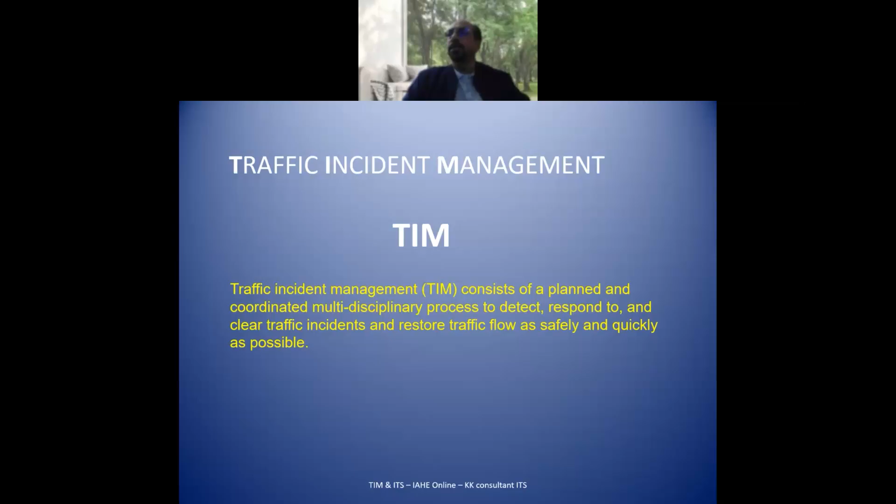Let us now look at what is a traffic incident. An incident is defined as any non-recurring random event that causes a reduction of roadway capacity or an abnormal increase in demand. When traffic is flowing smoothly, everything is all right, and your surveillance and cautionary systems are awake to make sure that if anything goes abnormal, they jump in immediately and start acting on that. Now, what are these incidents?

It can be a traffic crash, between vehicles coming and pushing at each other. A broken down vehicle, got broken down, tire punctured, or engine getting heated up, or whatever way. The third can be spilled cargo, and mind you, if the cargo is chemicals of different order, or petroleum, or any such things, the intensity of the incident grows. And then there can also be incidents during highway maintenance and reconstruction.

And the other type of events that could happen are non-emergency events. You have games scheduled near the traffic region, so you can expect a lot of vehicles coming at a time towards the game venue, and also the same way when it is actually over. True for concerts, or even public protests or meetings, and things like that. These kinds of events happen on a highway, and how effectively we are able to handle it is what traffic incident management is all about. The most important and difficult thing to handle is to avoid the secondary crashes.

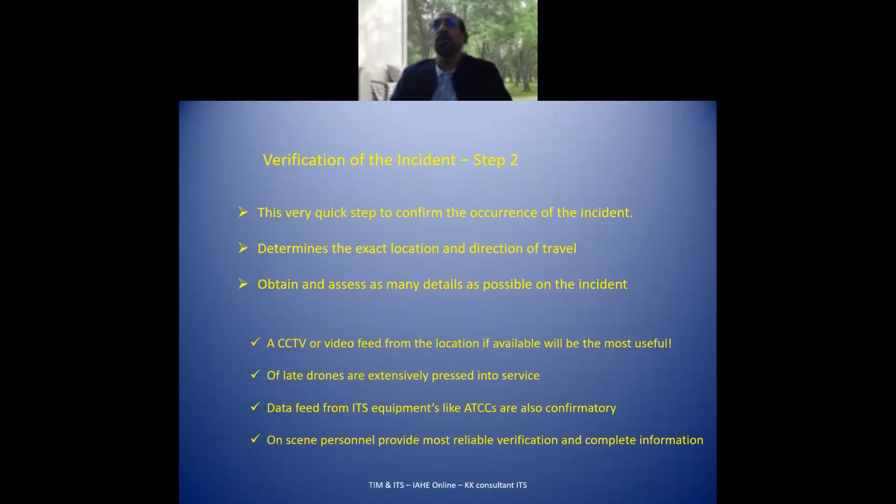And then the on-scene personnel - there will be good Samaritan drivers who stop by, stand at the incident center, and then immediately start giving information and details to the control room as to what is actually being witnessed by him.

The technologies used for detection and verification are inductive loop detectors. These inductive loop detectors are simple electric copper coils, 1 to 2 inches below the ground with some voltage passing on them, which creates an EMF. When vehicles, largely metallic vehicles, pass over them, they cut the flux and create an EMF based on which it can register a presence and even provide data as to the class of the vehicle and things like that.

Similarly, magnetometers are put in the locations. Microwave radars, I just mentioned to you, are used extensively in Europe and the Middle East. Infrared detectors are used where we have higher problems of snow and things like that. Ultrasonic detection is also used in many places. And video imaging - when the visibility is good, video imaging and image processing is the best process available.

Provided the environment is clean and you are able to see the thing. Closed circuit television camera, of course. Location systems, GPS things, can actually take input from different places and combine them so that you have a primary, secondary, and tertiary confirmation for the incident, and then go ahead with the next plan.

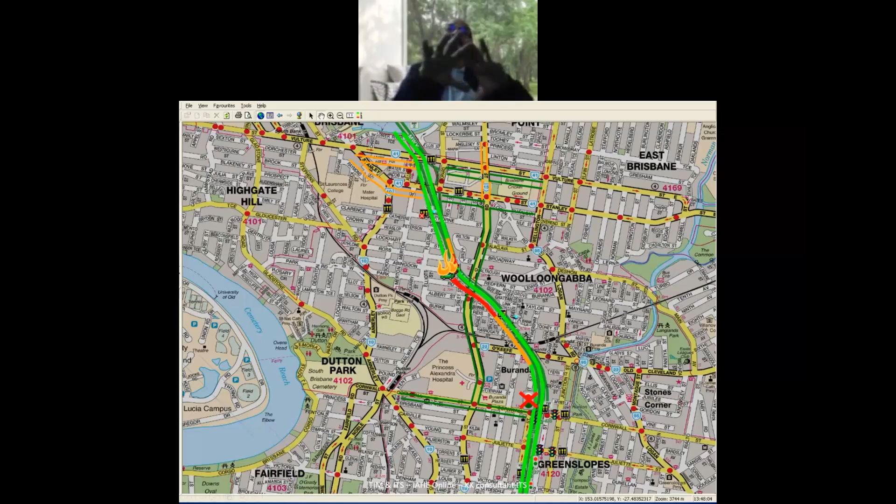But suppose now, what do you do next? The first thing you have to do is that traffic is already piling up here, so the entry to that location is locked and closed first. They close the junction, and the next thing is the variable message signs go out to all the people, informing them where this particular incident is happening.

All the traffic which will get affected by this particular incident is notified using VMS. Mind you, each VMS has the appropriate and right message for them so that they do not make any mistake. Here is the first example.

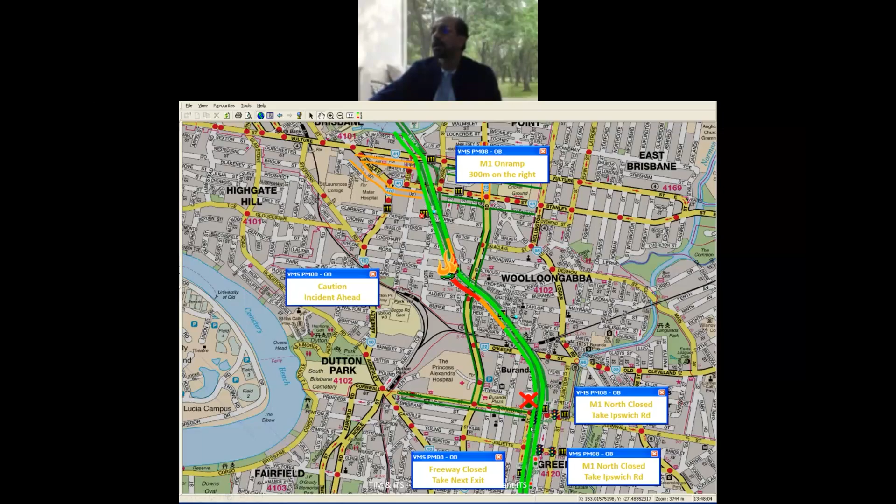It clearly says ahead, the freeway is closed, take the next exit. So people normally take the next exit, the junction, and then here is some trailing traffic.

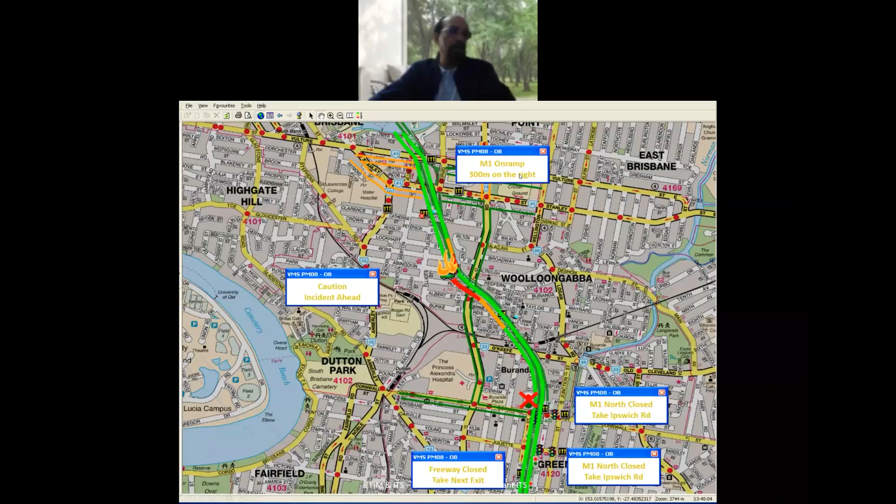Trailing movements into the highway are closed, so they are asked to take alternative routes. At the end of the road, ramp meters at those locations are also organized in such a way that they behave separately.

Once this is done, the traffic signal system actually reroutes the traffic. The traffic coming here is automatically asked to turn left. This left-hand traffic, though the road is not as good as the highway, is given a green signal corridor, cutting across the incident portion and joining the highway at a later end. In this way, the whole traffic is managed.

All this happened much before I finished the first sentence. So that way, ITS technologies are using incident management in a very, very effective way. But I have tried to get something similar to explain to you from the Indian environment, and I'm told I have to wait. So let us see that we don't have to wait much more for this.

Now let us look at what is happening in the Indian scenario. What we saw was an Australian incident, and now what will happen in India. This is an area which is yet to mature; there is no maturity at this level, though the right steps are being taken in that direction.

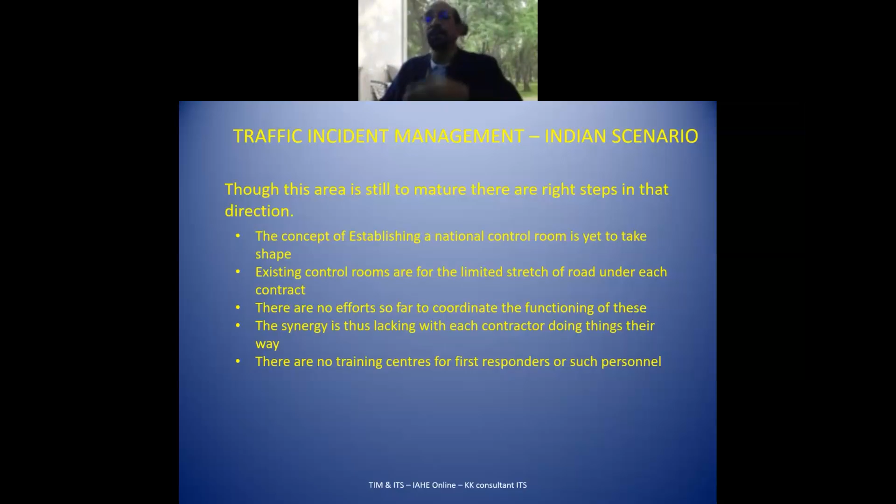And then, our respect for data. A few years back I asked the chief of road safety in NHAI how many people died on NHAI roads last year, and he didn't have a count. You ask NHAI brass what is your traffic at the moment on different roads, they have no clue. This is because the connectivity is not done.

NHAI as an organization has to think from a different point, not just looking at things in a limited way. At the moment, NHAI as an organization doesn't have a soul.

They have one or two, two or three service officers sitting at the helm who have limited exposure to technologies and things like that, and engineers and others coming on deputation from different PWDs and all that. All of them come with their own baggage of working systems. NHAI as an organization, I think even recently there used to be a GM, DGM level post in electronics and IT. I was checking recently who holds it, and I found those posts no longer exist.

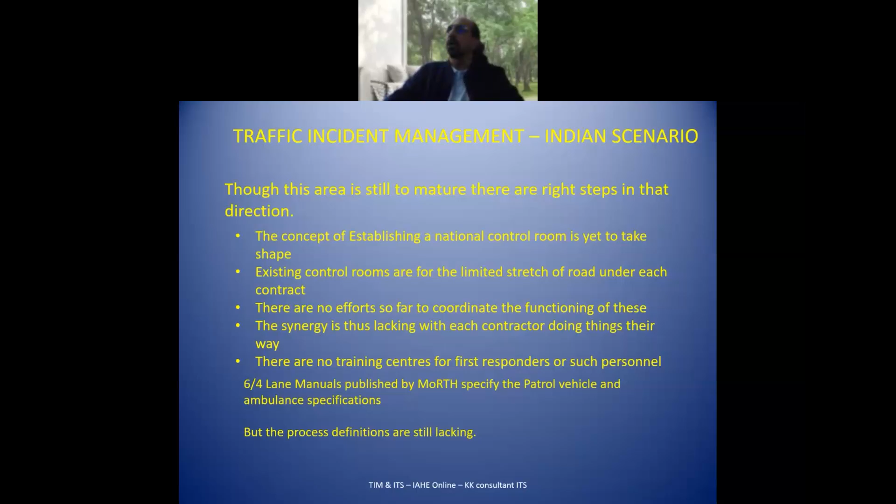It says there should be AVLS, there should be a two-way radio device so that even if the mobiles are not working, radios has to work. There should be a public address system to announce with an amplifier and loudspeakers at the accident scene if needed, and definitely one cellular phone.

And general surveillance equipment like digital camera, high torch lights, safety jackets, gumboots and helmets for every attendant. Rain suits, liquid containers of petrol, diesel, water, and rope, and minimum things like whistles and hand signals.

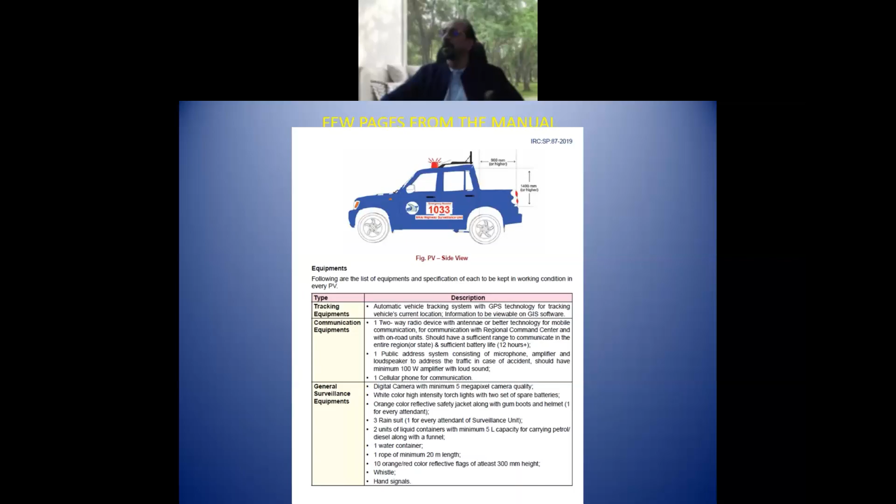It should also contain first level vehicle restriction and repairing equipment - hydraulic jacks, animal handling equipment if needed, tire inflator, starters, tow bars for towing lines, and a normal mechanical kit with hammer, pliers, cutters, wrench, and all that kind of stuff.

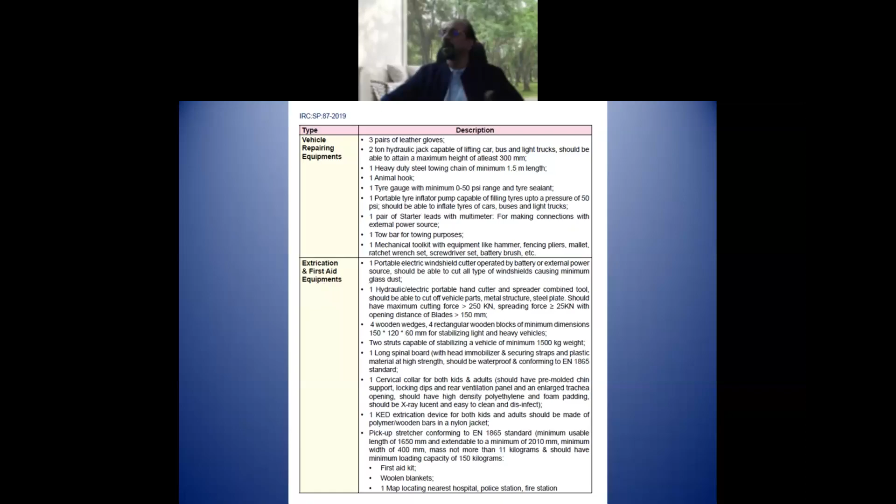This vehicle repairing equipment also contains extrication and first aid equipment - portable electric windshield cutter operated on battery, hydraulic electric tools, cervical equipment, and other things.

When you actually do traffic management, you should have fire extinguishers, dry powders, asbestos and rubber gloves or whatever. All the items that you should find in a standard patrol vehicle are listed very clearly as per Indian specifications.

Now it has retro reflective signages, but at least that is one thing I find - till recent years, nobody used to wear even the retroreflective signs on Indian highways. But now things have changed, people started wearing them, and that is a good omen.

And then you have surveillance in charge - one person is to be there as the main coordinator from the control room, similar to the 911 operator as I was mentioning earlier. The highway surveillance should be appointed per shift per vehicle, and they should have relevant experience and should create a logbook.

They should be trained on vehicles and maintenance policies, radio communication, public relations, defensive driving, customer service, maintenance of traffic - similarly, all rolled into one kind of training. They are not supposed to be experts, but they should not be making blunders because they don't know. That is the key for training.

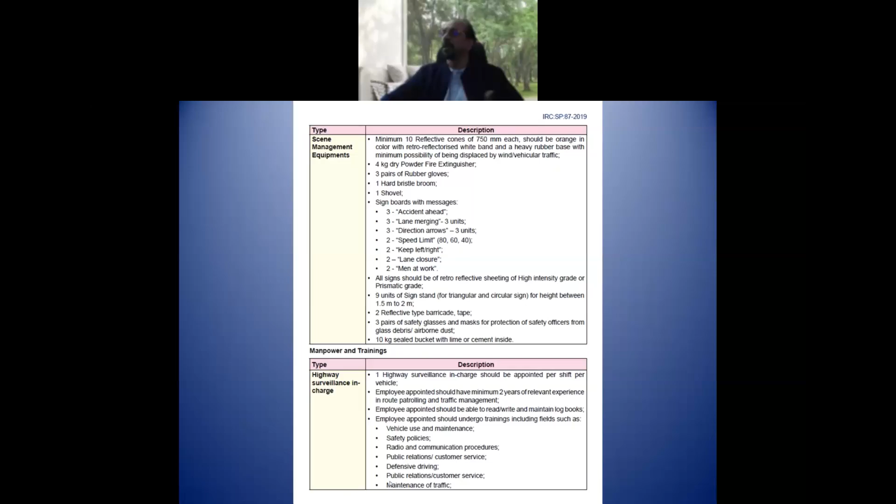And then they also should know the vehicle recovery procedures and all that. And then the EMTs, basic qualification of EMT, there should be a diploma in EMT. The qualifications of the people who are employed there are all very clearly stated.

Employee appointed should undergo at least one month training for this kind of things. I would actually want to bet, out of the thousands of vehicles flying on Indian roads, how many actually have this - not on day one, but 180 days or a year after putting into service. If any patrol vehicle in India can confirm that they actually do this, I would be pleased to award them with a cash award. And all the students, all the people here, are eligible for the recommendation.

This particular document also goes and talks in much detail about the emergency medical van. It specifies each van's equipment in exact detail, the capacities, the power management, and it should accommodate two serious patients at a time, with minimum required equipment. Some salient portions I felt are worth highlighting here.

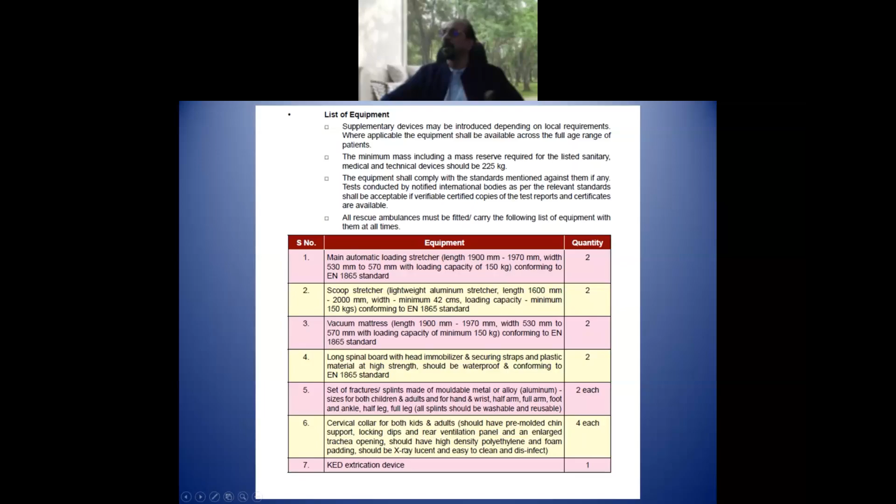You see, even for children, they wanted a separate shape of collar, and even trachea opening ventilation panels made of high density polyethylene and foam padding, and it should be X-ray lucent. And you see the list of equipment - oxygen cylinders, portable oxygen cylinders - all fine, even pulse oximeters, stethoscopes, and blood sugar detection, all these things are provided for.

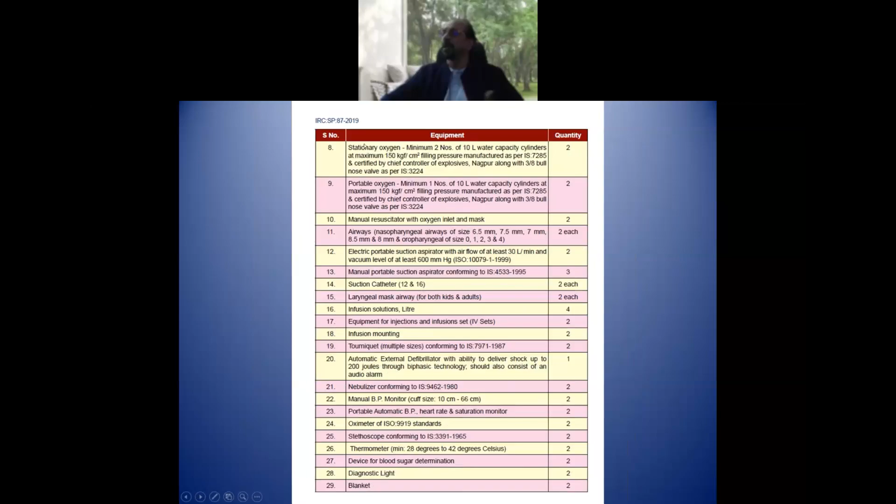But you go and look at any of the emergency medical service vans posted on our highways, and again my offer stands - I'll be willing to provide a cash award to any vehicle these members are noticing which can be recommended. And then there's the manpower of the ambulance.

You should have proper ambulance personnel. First aid becomes the most important thing in actually securing the person from getting into more trouble. They need at least 2 years experience in first aid and life saving, emergency operation, bleeding control, spinal immobilization, oxygen therapy, defibrillation, medicine.

Not to talk about fundamental things like post procedures and things like that, and training on handling life-saving equipment and basic training in extraction, and also there has to be paramedics on board.

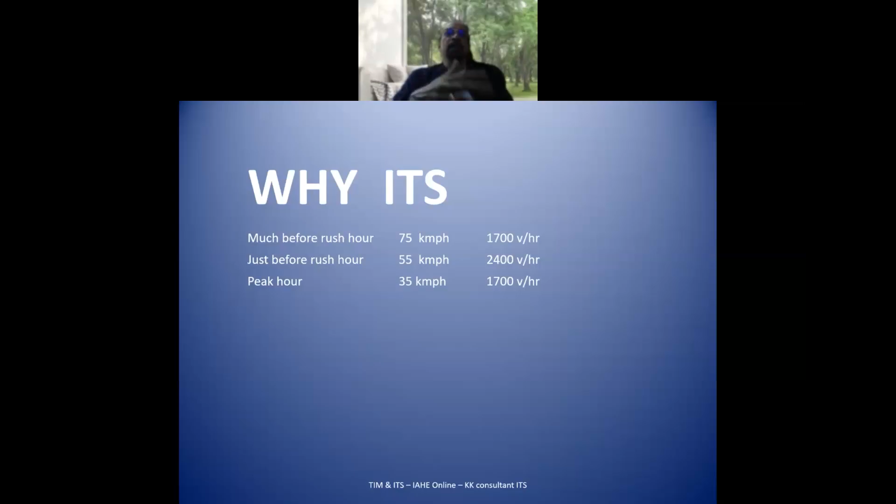Now we will talk about ITS. Everybody knows what is ITS, Intelligent Transport Systems. There are many kinds of definitions. The ITS handbook I saw some time back described some 30, 36 types of definitions, but I would like to consider it as IT in transportation. It is about providing information to motorists and aiding traffic management, resulting in smarter use of road networks, and it has to do with knowledge management. This is the most cost-effective tool available to traffic managers as of now.

Now, why intelligent transport systems? Consider a road near a city or a highway feeding some urban center. Much before the rush hour, say morning 7 o'clock, if you look at the traffic, you will find vehicles going at say 75 kilometers per hour, and we have a clearance of 1700 vehicles going per hour. As the traffic builds up, just before the rush hours, the speed comes down to 55 kilometers per hour, and the vehicle flow becomes 2400 vehicles per hour.

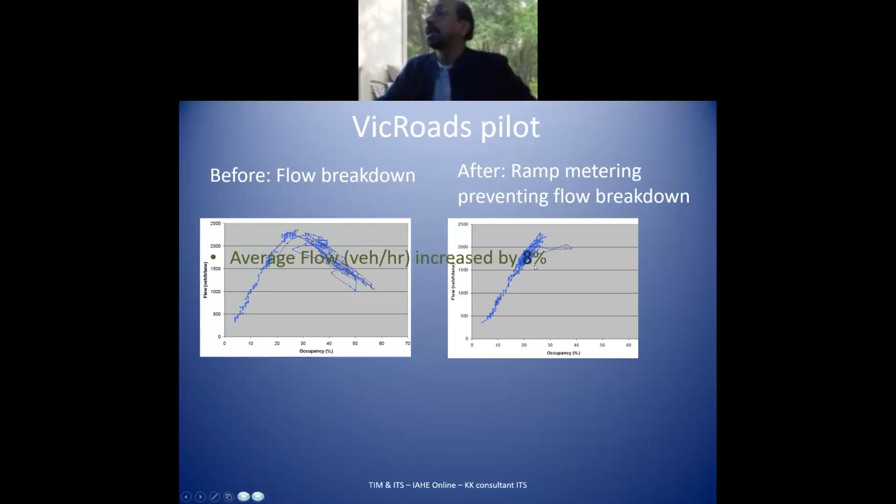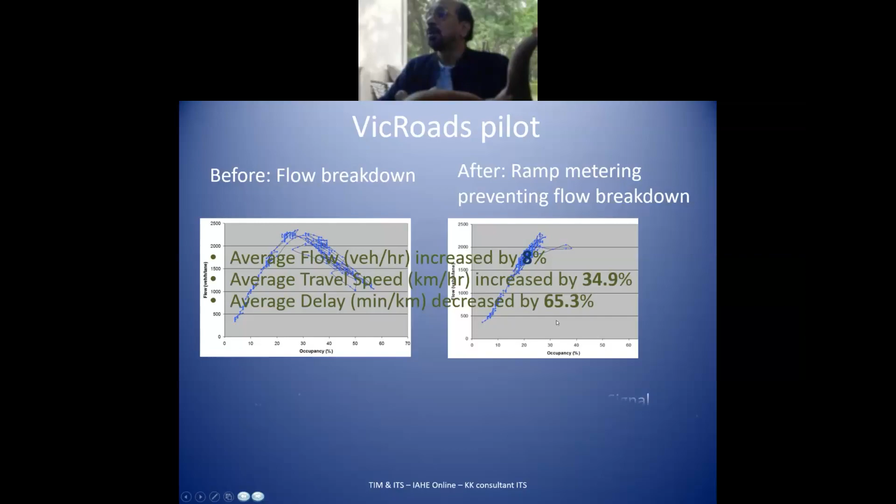When there is a breakdown, when there is a congestion - this is actually a VicRoads pilot. VicRoads is a state government road organization of the state of Victoria in Australia. This was an award-winning ramp metering algorithm which they developed and is being used by many people. It is available in the public. But when the breakdown happened, this is how the traffic came to see - the occupancy has gone up to 60%, and the flow of vehicles, which kept on growing, at 2,500 it stopped there and didn't go further. And instead of the level of service, the speed started coming down.

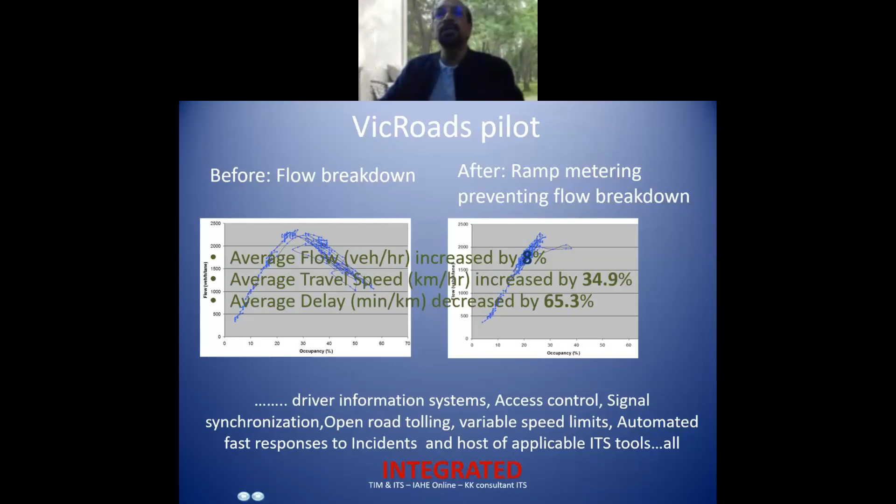When we introduced ramp metering, this is similar to that lady operator pouring the rice directly into the funnel. The ramp meter is able to provide traffic flow unhindered by controlling them upstream, and the breakdown didn't happen - the vehicles kept on going the same way. Here, what you see is the average flow increased by 8%. These are documented, and average travel speed increased by 34.9%. More importantly, the delay decreased by 65.3%. This is what ITS did in an environment which was otherwise unhelpful.

So what you are doing here is ITS - when you talk about driver information systems, access control, signal coordination and synchronization, open road tolling, variable speed limits from the control room, automated fast responses to incidents - the subject we just covered in detail - and a host of other applicable ITS tools. All of them in an integrated manner make it a proper ITS system.

Now we will go into the applications. What are the ITS applications?

ITS applications, first and foremost, aim to improve traffic flow and reduce congestion. If road capacities or intersection capacities reach a breaking point, an ITS system can increase the capacity of the network by a minimum of 10%, meaning 10% more vehicles can use the same road while enjoying the same level of service.

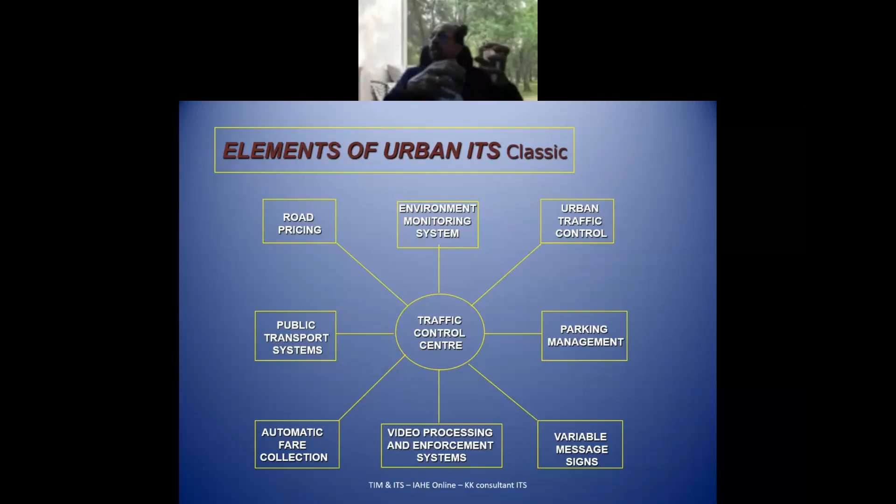What the system does, if possible, is extend the green time available. If the green is already running on that particular link, the public transport system will increase it for a few seconds so that the public transport can go through. Similarly, it can open a red to a green when the public transport arrives, depending on the priority fixed for them. And of course, there's road pricing - we'll talk about that also.

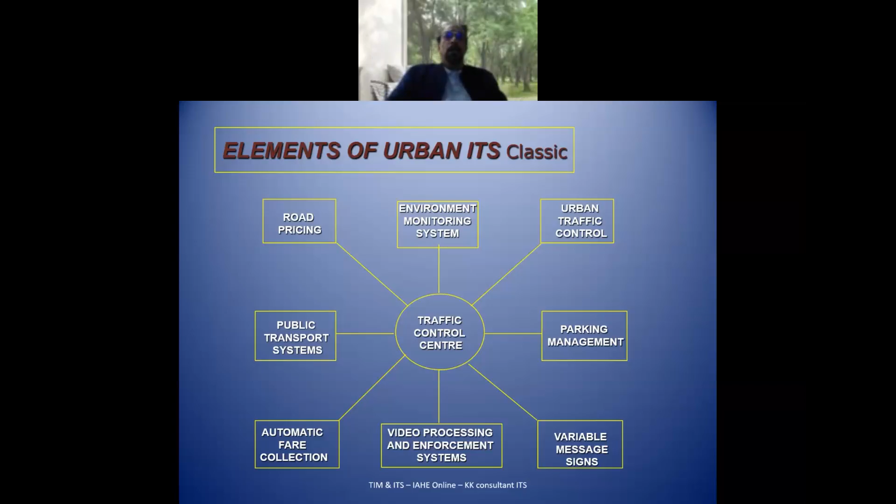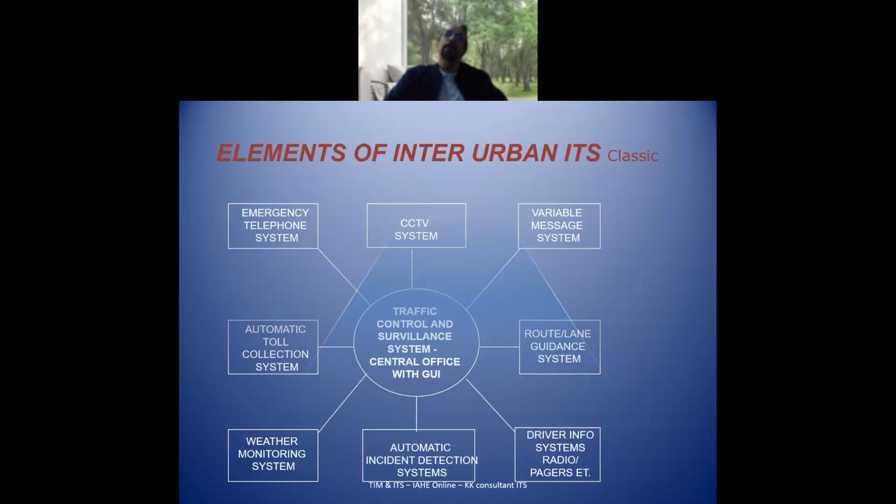These are a separate set of subsystems that form an interurban or highway traffic control system, distinct from an urban traffic control system. In the urban traffic control system, all this equipment works 100% of the time.

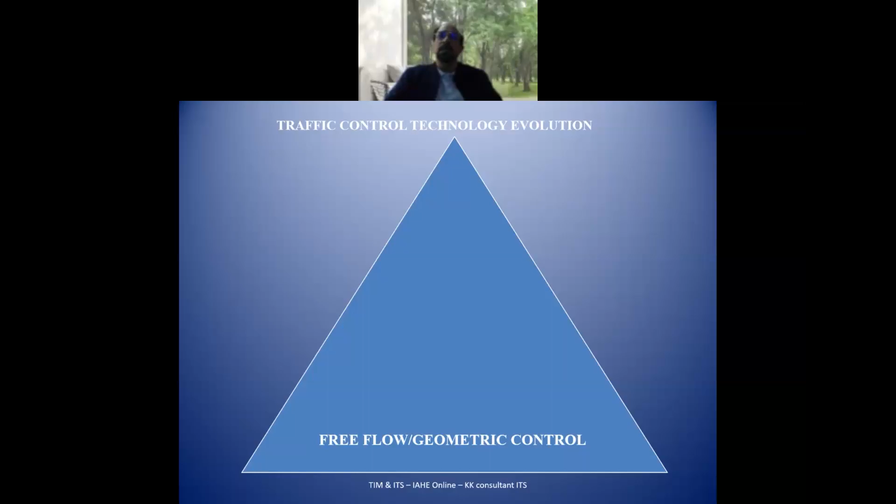The urban system keeps collecting data, making arrangements, changes in traffic flow, and adjusting traffic signal timings, parking measurements, video processing - all these go in as standard. Whereas in this system, except for toll collection, everything else is a standby system.

It comes into action only if something unnatural or unexpected happens, like an emergency telephone system lying in wait for an emergency and somebody to push the button. So the level of readiness and checking of the system has to be much more, because you should not let any of the system fail at the time of requirement.

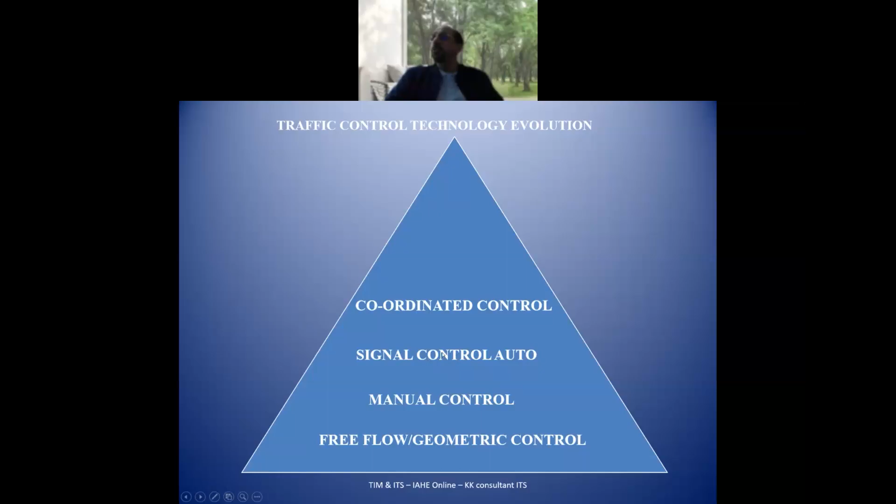The CCTV system also keeps doing all these things - they are actually sleeping, but in the right stage of awakeness. Anytime they can be put into action, except the toll system, which keeps working.

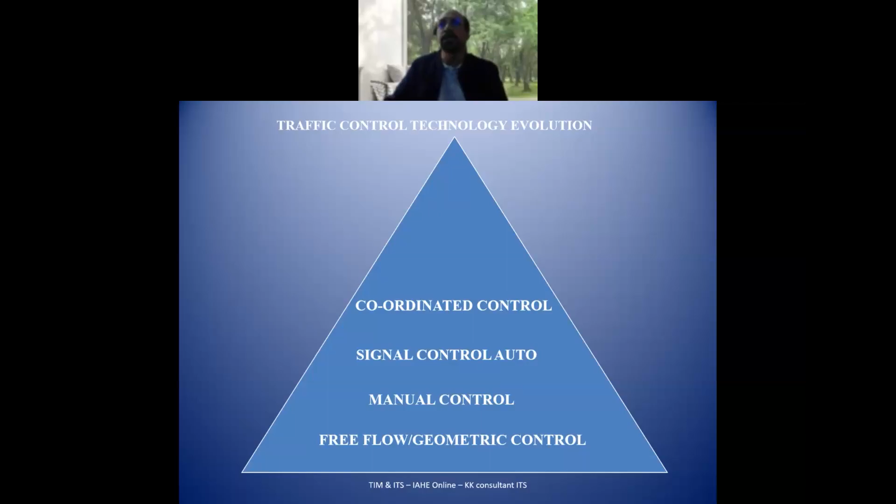Now let us look at the technology of traffic control and how it has evolved. Imagine a small junction that has come up near your neighborhood. Initially the 4 roads are there, and traffic just goes because there is no control - they manage themselves. Then sometime in the evening and morning, it gets a bit crowded.

Then a policeman or a traffic warden will come into the middle of the road and start manually stopping the traffic from going in one direction to the other. Then you have the next step, signal control.

You put an automatic signal in place. This automatic signal will have more timings during peak hours for the peak traffic, and during off-peak hours, it will get into a low cycle time and start clearing vehicles from each direction quickly. And at night, maybe they will just go to flash.

The next one is coordinated control. If you have 2 signals at 2 nearby intersections, the output of one junction becomes the input of the other. If you are able to manage that, that is called coordination. So this is the next step of technology.

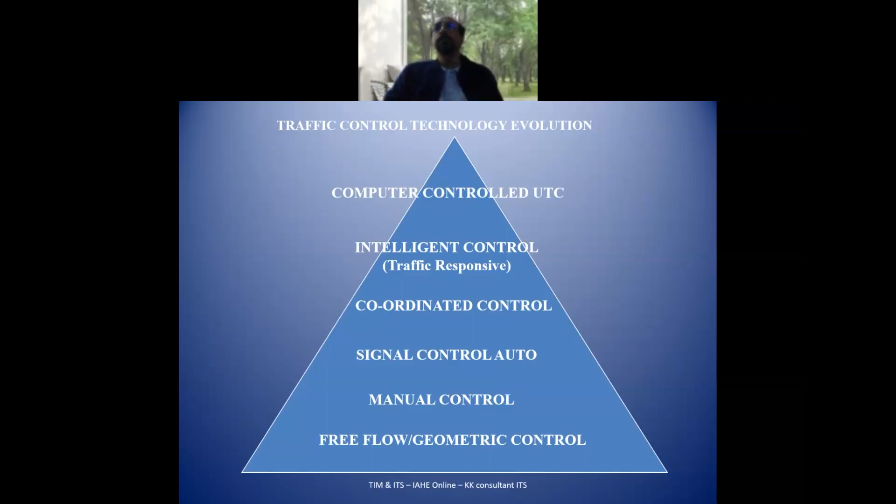And then we got the intelligent response. In the intelligent response, what happens is there are loops or detectors in the system which are collecting data on traffic flows in a continuous online manner, and feed that data into the information system.

And at the intersection, there are supposed to be 2 levels of control: one is called tactical control, the other is called strategic control. In tactical control, the intersection controller takes a decision to extend the green or open one particular direction earlier, because the other traffic has lessened, or even give priority to somebody. That is a tactical decision.

Then there is another decision taken by the central control room - say, I want the nearby controller changed because of high traffic flow in some direction. It has changed the cycle length from 90 seconds to 100 seconds. So all the signals which are coordinating with that particular controller - they're called married systems - I'll come to that - all change strategy from the central point.

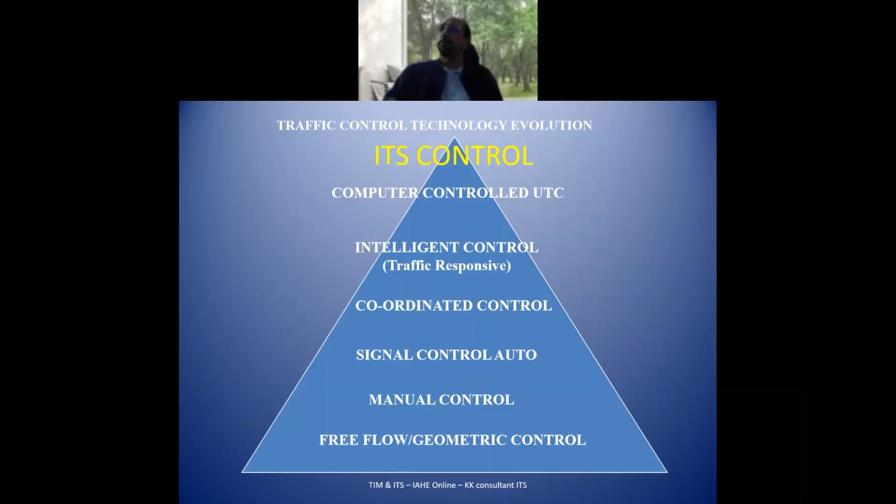The next level is called area traffic control, computer controlled UTC. In other words, in this, the controllers are all connected to a central control room, and all the data comes into the central control point. From there, each signal is advised every second whether to continue the current state or go to the next stage.

And in this level, you don't find anything other than traffic signals and traffic detection at signals and traffic lights. The next level is ITS control, where we bring in a host of other subsystems like variable message signs, public transport priorities, and communication control systems which are used by transport agencies to have control.

If all the systems that come up with information, even the taxi aggregators, share the information with the traffic control room, it can provide a good travel time survey, travel time data, so that people are aware of things. Now ATC stands for area traffic control. This is also called UTC because they start mixing up with air traffic control.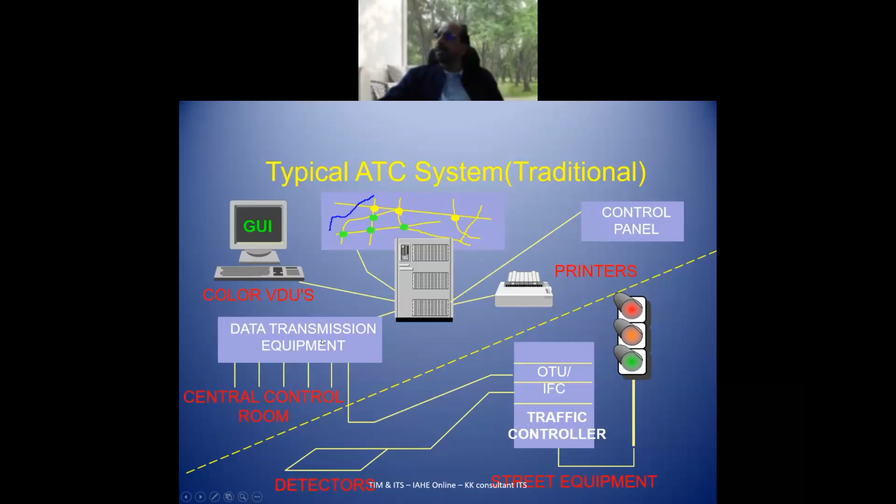Whereas other cities have changed into smart cities and have some rudimentary type of traffic control systems, not really smart ones. So except this ATC in Bombay, I don't think there is any other real internationally valid system working in India at the moment. In Bombay, my team only installed that in 2009-10. It is 13 years old and now it is in the process of being replaced. But it's still working - I think they are covering some 256 junctions, and they have contributed to road safety in a substantial way.

I wanted to give you a small idea of a traditional system. In that you have a traffic controller. This traffic controller has street equipment, signals, and an outstation transmission unit and integrated front-end processor, and it has the outstation transmission communication, and detectors based on that. The detector data goes through the transmission system, which used to be a very cumbersome process those days, to the central server, and the central server will have video, display, printers, and the control panel. That will give information back to the signals - data is collected from here, goes here, and again the instruction will come from here and go to the signal line.

I will just cover quickly the algorithm behind SCOOT, one of the most successful traffic optimization online systems. I want you to concentrate and understand this - it is a very small thing. Take one cycle of traffic. One cycle of traffic is the traffic from one point to the next point where the same point is reached.

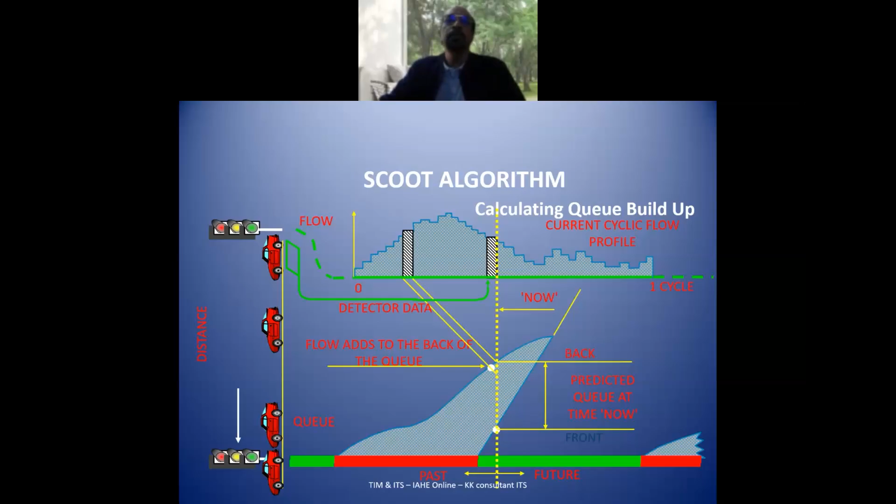In the next few seconds, the queue starts melting away. These vehicles which are there from the previous cycle keep going, and the major traffic which is coming here, without making this queue huge, it dissipates, with some small change in the traffic flow. But then the majority of the vehicles from the 30th percentile onwards are able to go through the intersection without changing their gear. I hope everybody followed this.

This is a very simple explanation. Now imagine this intersection has one link we talked about. Similarly, this particular intersection has another 8 links coming from every intersection on the 4 sides. So you have to have all these links do the same kind of thing, building up the flow at each link.

After some iterations of working, the computer system is able to get into a rhythm in which the traffic is moving quite well in the area. There are no queues formed abnormally at every intersection. Before the queues are formed at every link, it is opening and going. You can actually view this in the intersections where they work. We have done it in Delhi, in Bombay, in many places. It is a perfectly feasible system.

I'm not spending much time on this. What I want to talk about now is optimization - the objective functions, the priorities on which your computer system will start working to get the system into an area where it is able to provide the best services. Increasingly, additional objectives achieve more inclusive overall optimization. Developments in ICT, information and communication technologies, enable us to break free from traditional limitations and provide more action.

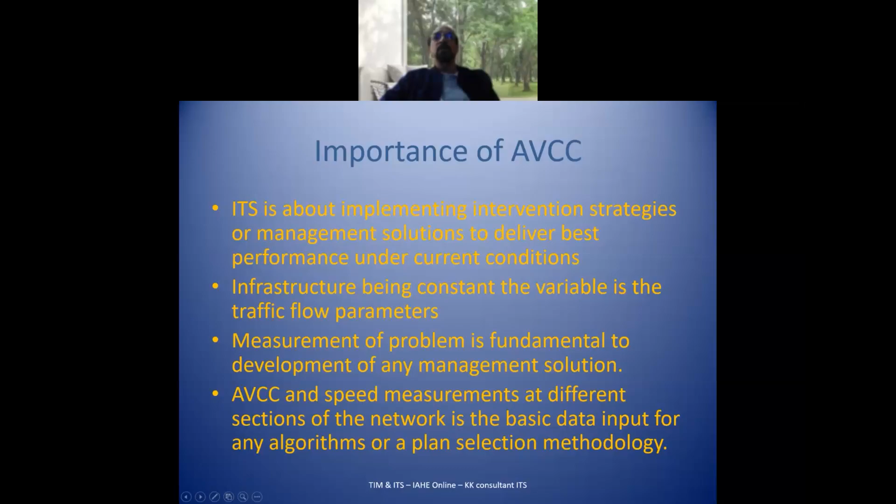Now, what ITS is about is the data - data about vehicles. This is one key point I wanted to emphasize. I want practicing traffic engineers to be better informed on these technologies so they can actually act. Everybody knows the importance of data - the importance of AVCC is just that. An ITS system is useless without proper data.

This is about collecting different types of data. AVCC can measure with infrastructure being constant - the only variable is the traffic flow parameter. So unless you catch that, measurement of a problem is fundamental to developing any management solution, otherwise you will never know what happened. AVCC and speed measurement in different sections of the road is the basic data input.

So I will go through these things a bit quickly now. There are different types - infrared detection systems here.

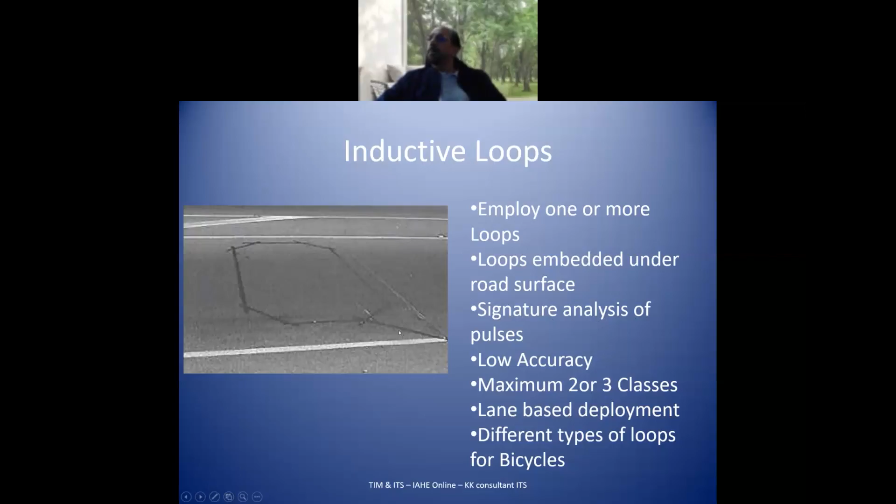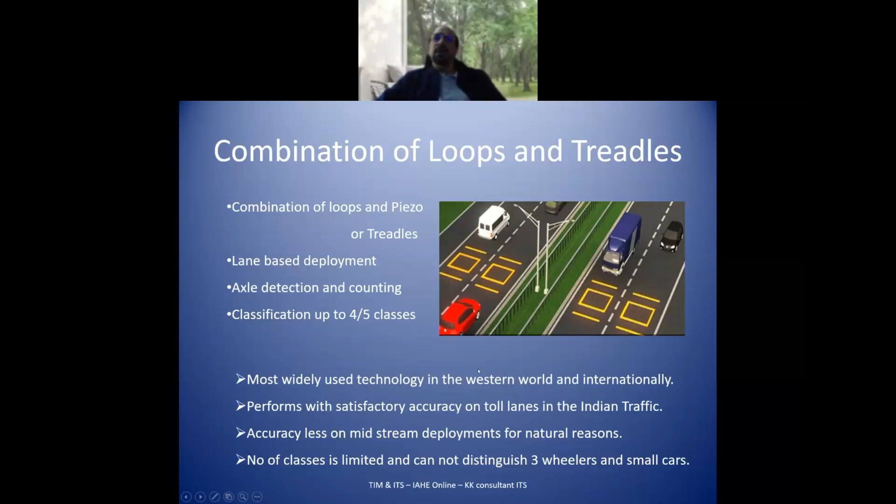These are one of the most conventional ones - again loop-based, for lane-wise detection. You put a loop, an electronic simple copper cable, one or two inches below the ground, connect them into a roadside unit, and pass a little voltage between them. So they form a kind of electromagnetic field around them, and when a metallic body goes above this, it cuts the flux and creates an EMF at the end. That is taken as a signature of that vehicle, and then it is analyzed. Then you have a combination of this.

This is one of the longest used, very heavily in tolling and things like that. You have a loop, and then you also have some kind of piezoelectric or load sensors. Here they allow you to measure the speed, taking the time as axles pass one load sensor to the other, and also take the measurement of size using this. It is very good, but still cannot distinguish a few things in our location, like types of cars and things like that.

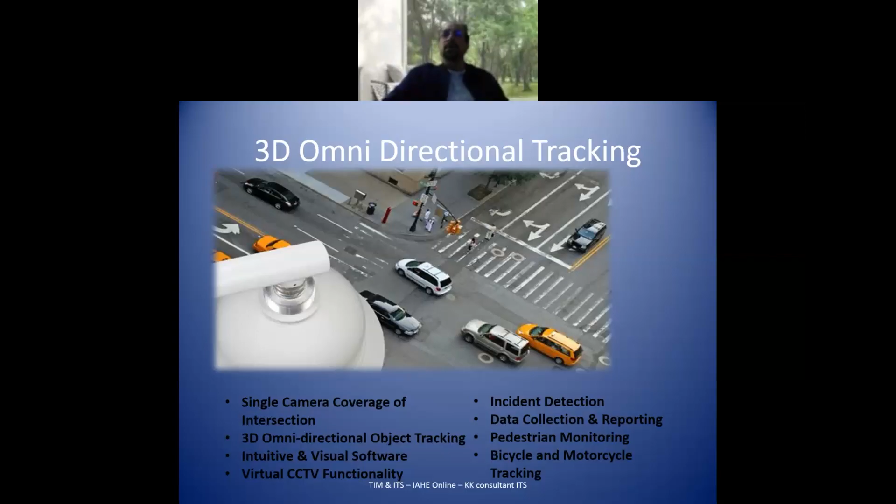The AI processors are not cheap, and they can't be portable. So what best AI can do today - unless it is simple iterations and hill climbing techniques and that kind of thing - no real AI is available on a portable device other than learning curves.

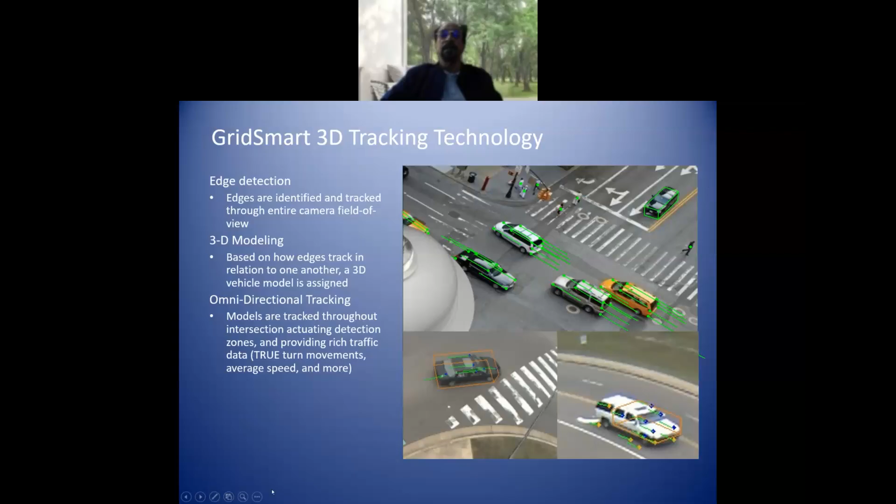This is another interesting thing, a similar concept. This is single camera coverage - right in the middle of the junction, imagine, you put a camera. And it's a 360-degree camera, 180 and 180, so it is able to see vehicles coming from 300-400 meters away, from either direction.

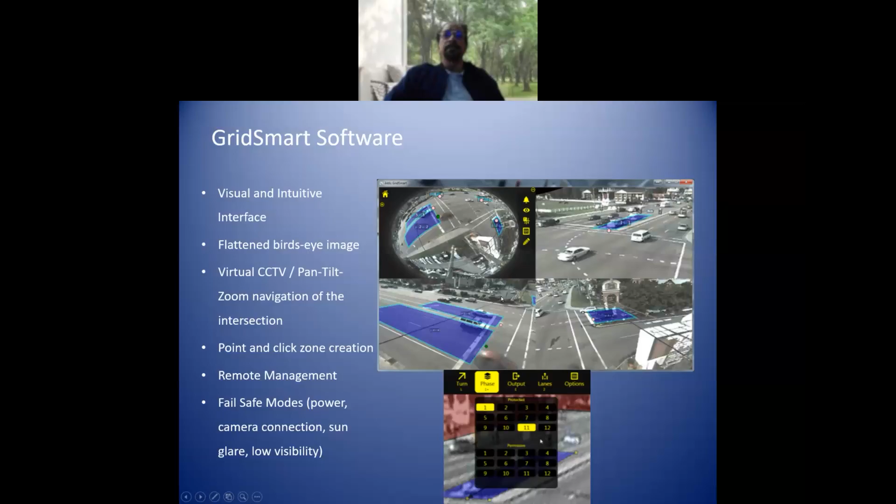So when this vehicle is right in the middle of the junction, it is able to detect the edges. Using the edges, it is able to provide 3D modeling, and using omnidirectional tracking, it is able to provide you the class of the vehicle - whether it's a small car, a big car, a pickup van, or a truck, like that.

This is a software which I am working on. It is from a company called GridSmart in the US. This is actually the first view, a bird's-eye view of the camera output. But using video editing facilities, you can make it look like each direction separately and look at it.

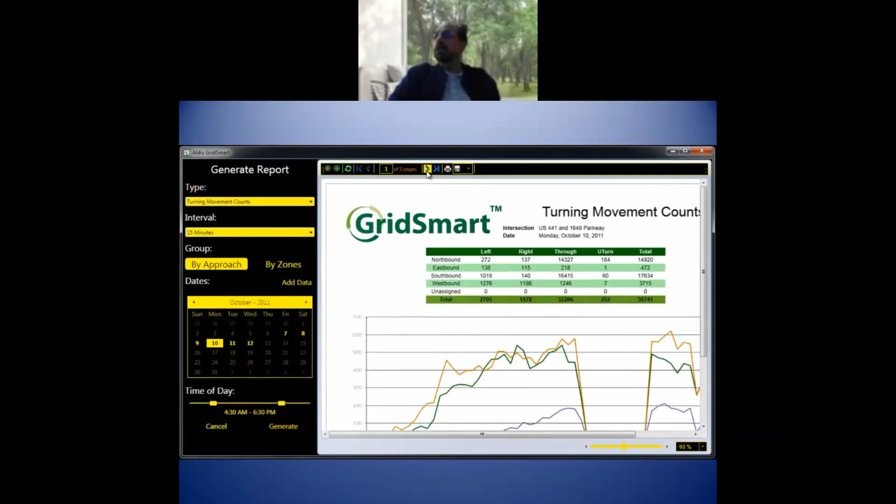It is very easy to create zones like this. There's a virtual pan and tilt available because it's a camera like this, and it can pan, tilt, and zoom to a certain extent, but very limited - zoom navigation of the intersection is only electronic. Point and click, you can just click here and create a zone like this, for example. It's remote, it's an IoT-ready project.

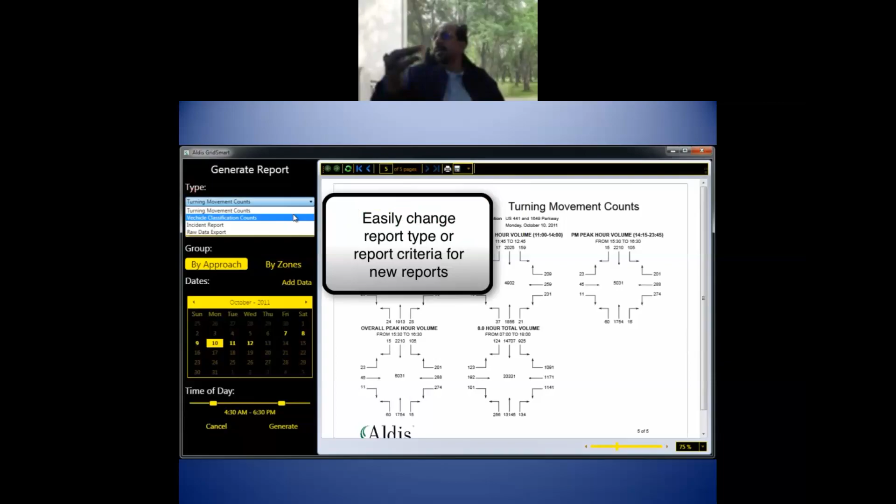There are fail-safe modes and things like that. This enables data collection from different sources, and it can generate data immediately the way you want it.

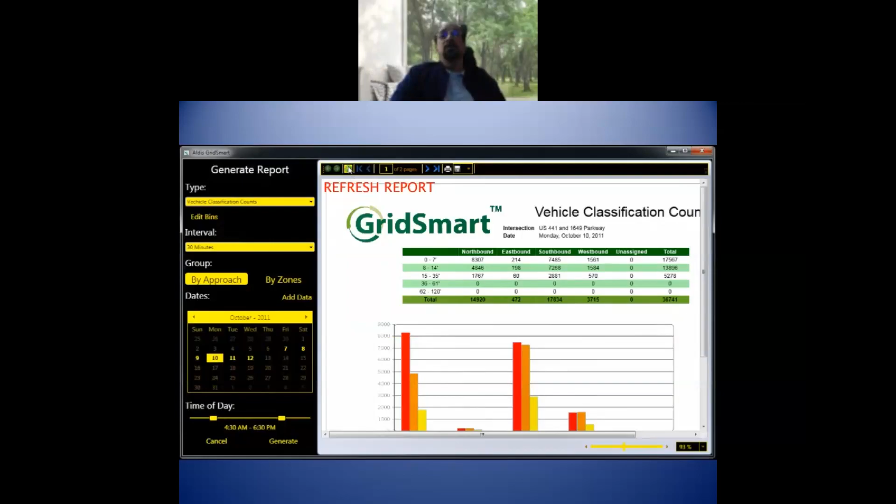On a highway, you can put a portable pole, and on top of the pole, at 12 to 14 meters above the ground, it can provide you data - it takes just 30 minutes. But in India, this is too costly a solution. So we tried this in Bangalore, in Mumbai. This is a very important thing.

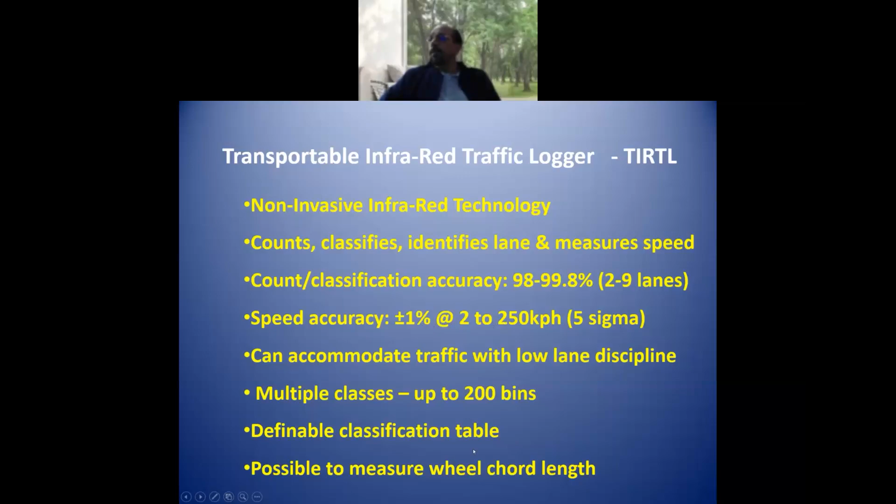Using GridSmart, traffic analysis. You can make this. You just select the system that you need, and then you want to build a report. So just select how many minutes, by 15 minutes, yes, by approach. What is the date you want? Pick up the date. What is the time of the day you want? Pick up the time of day that you need the report, and then say generate.

So here you have your report at a remote point. You have the northbound, eastbound, southbound traffic of any intersection. You can have the daily peak hour, peak moments, and you can get it in Acrobat or many kinds of formats. You can create bar charts.

This classification is based on the length of the vehicle. You can change the length bins. 0 to 7 feet is motorcycles, 7 to 14 feet is small cars, and then you can change that. So it is that simple to create data from this modern equipment.

The next one I want to talk about is the TIRTL. This is a non-invasive infrared technology. It counts, classifies, identifies lane, and measures speed up to 99.8%, minimum guaranteed is 98%. It has up to 200 bins. Unlike any of the other systems, it can accommodate traffic with low lane discipline. It has speed accuracy of plus or minus 1% up to 250 kilometers at 5 sigma.

It can define a classification table. I found this system when I noticed it in 2004, 5, 6, and realized it could be used for India. I happened to work with this and develop special software for India. In the next few slides, I will show you how it is done.

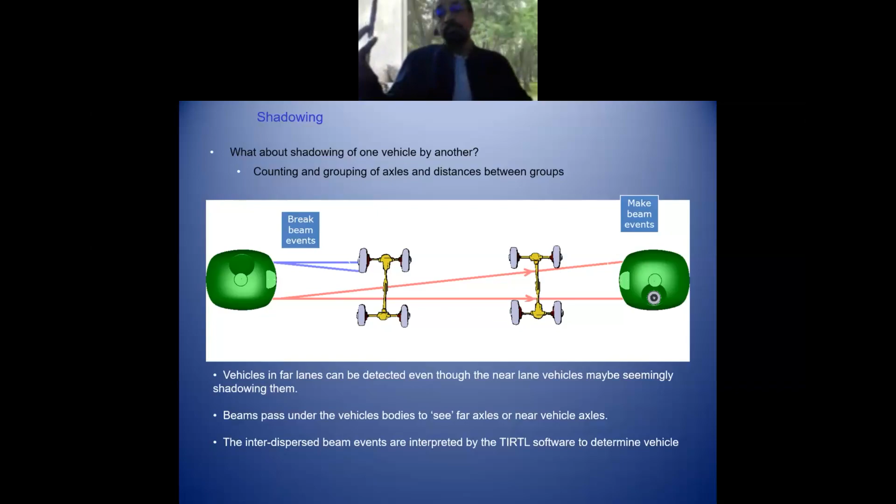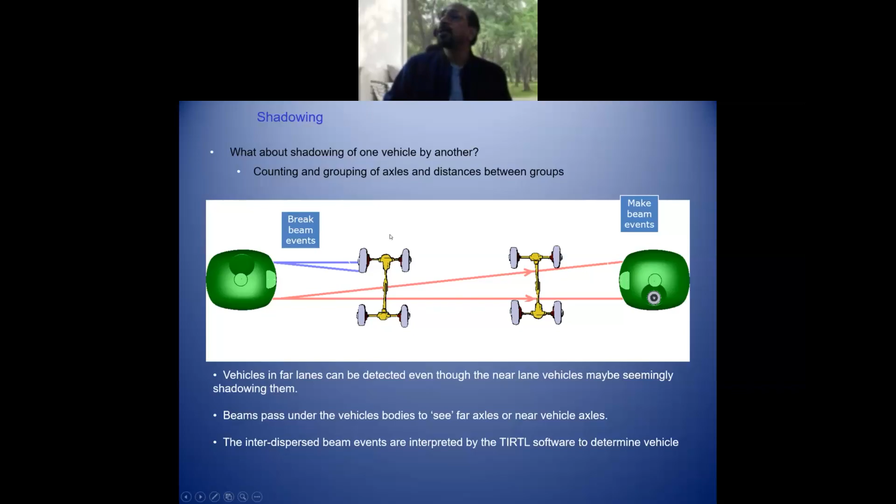Mind you, this is using an infrared ray, which has a wavelength of nanometers, and the controller, the computer used in the receiver, works at nanosecond accuracy. So we are able to make these measurements accurate to micrometers and microseconds. As vehicles keep going in this direction and keep breaking the beams, the algorithm behind the system starts producing the classes.

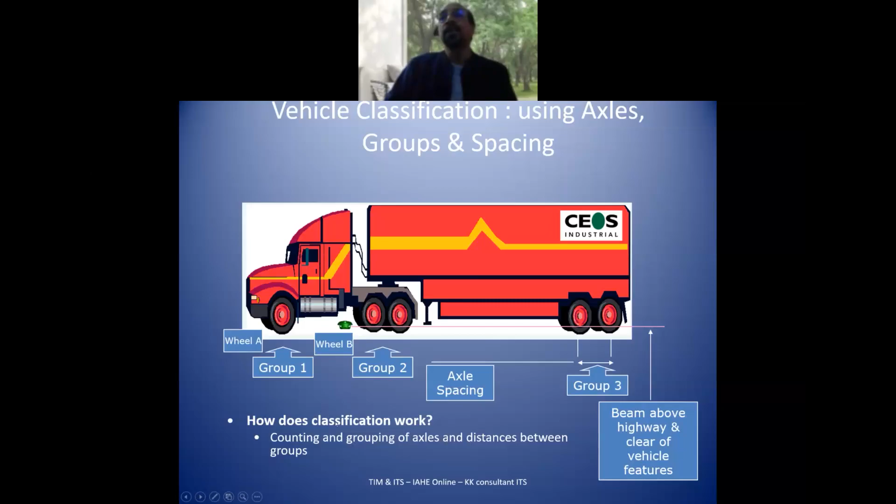Now, a question will be asked: if there are two vehicles going simultaneously, won't they obstruct each other, causing one to get missed? The far lane vehicles may shadow the near lane ones. But this patented technology, using a parallel beam and a cross beam, helps you see a vehicle even if it is exactly the same vehicle going at exactly the same speed, which is improbable. Even in that event, it gets detected.

With this system, instead of by lane, it detects the vehicle anywhere on the road. When a vehicle is going, suppose you define groups, such as a 5-axle vehicle using an articulated design, not a fixed one. You will find three groups of wheels, A, B, and C. The axle space between each of them is specified between these groups.

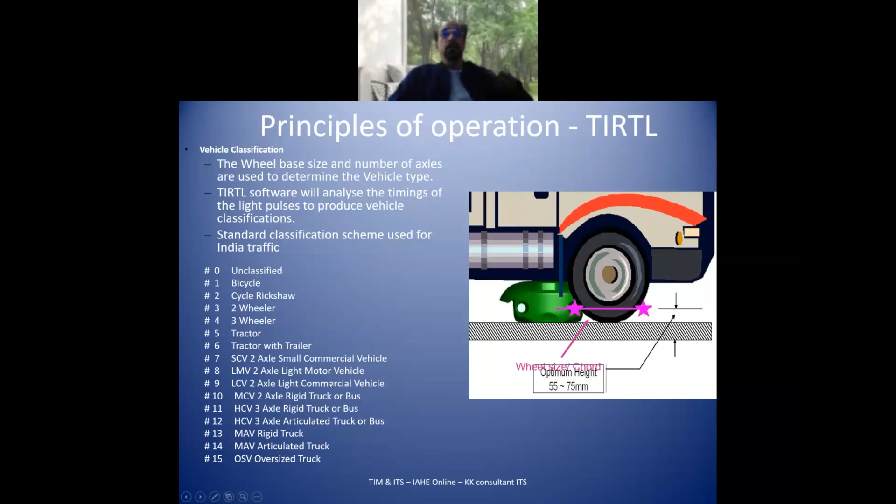So once this vehicle goes through the area where the TIRTL is located, the TIRTL knows how it has gone. By counting and grouping of axles and the distances between the groups, it is able to accurately classify this. Using this, when we first developed and put it in India, we designed 15 classes and got good accuracy.

The wheel-based axis, unlike other systems, can do a lot of other things. For example, classifying an LCV versus an Ambassador or a C-Class Benz is impossible for traditional systems because they have exactly the same axle length. But the tires used by them are different, the wheels used are different. The TIRTL is able to measure the type of tire used by each vehicle.

So when a vehicle is reported to the system with an axle length belonging to the LCV category, it will check what type of tire it is. If it is a car tire, it is classified as a car; otherwise, it is classified as an LCV.

Using this, we could have a classification scheme including all these things, and this was later modified to include the tolling pattern of NHAI, including 5-6 axles and 4-5. So you will start with bicycles, cycle rickshaws, two-wheelers, three-wheelers, tractor with one trailer, and very often you find it with two trailers. This is LMV, a motor car, light motor vehicle.

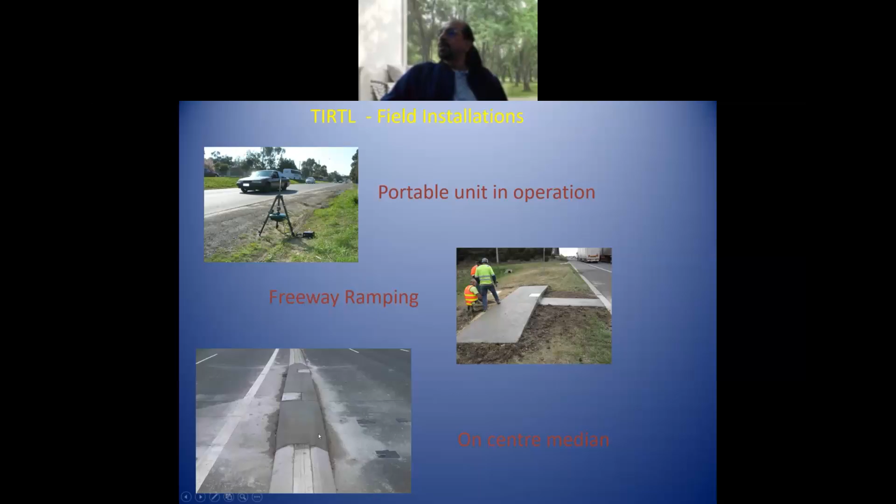So you find the number of classes from 2, 3, 4, 5, 6, 7, 8, 9, 10, and 11 do not exist for international products.

So this particular product was able to distinguish these vehicles accurately because we could look at their axles more importantly. And we have developed, together developed, a particular classification table and detection methodology for this, published it in India, and this gives you better than 99%.

And these systems are available, some 500 units already in India. This is the small unit which comes, which can be put on the ground at ground level, as you see. You can even put a solar panel and walk away, put a SIM. This is an IoT ready product. Even if a flood comes, nothing happens to it because this is IP67 range.

On the highway side, you can just put it like this and ramp on this. You can put a portable unit on one side and take data counts if you like, or you can even do it on the junction, on the road dividers. You can put two on either side. We have something like 400 units working here.

Now I have to show you a small demonstration of this.

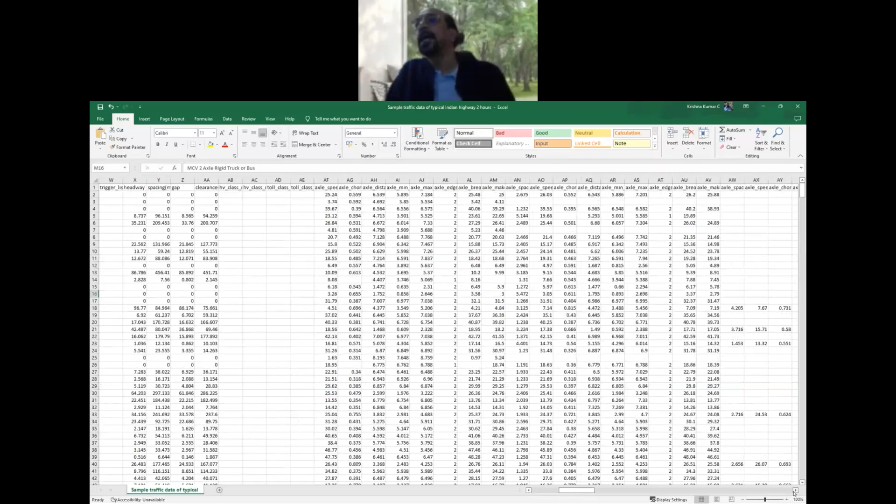This is the average speed. This is average axle speed. This is the direction in which traffic is going. This is the class number - what is the class of the vehicle which is going? What is the class name? It is what kind of vehicle it is.

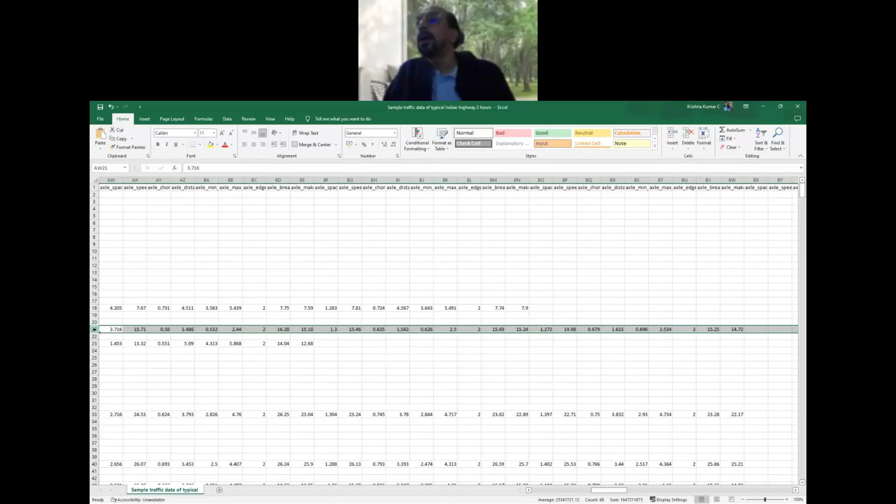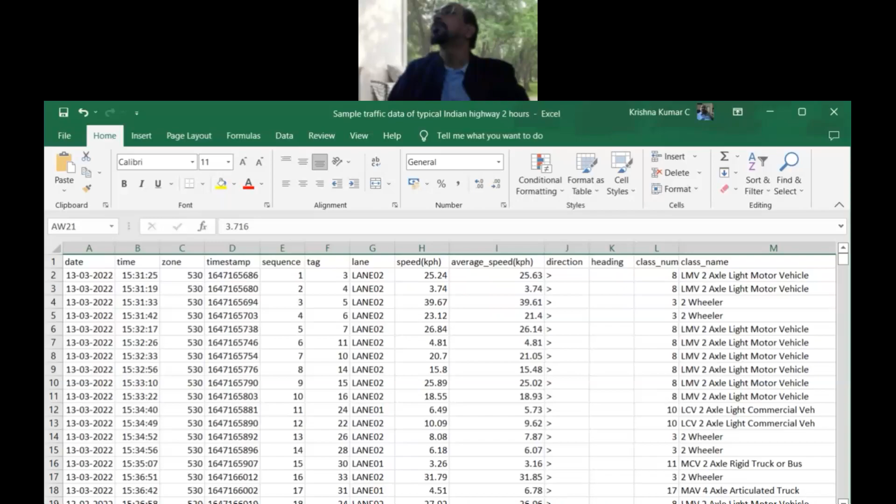You can see that 2-axle light motor vehicle, 2-wheeler, 3-wheeler. And then each of the axle data is given, how many axles it has. You have a 5-axle truck here, a 2-axle truck here, that kind of thing. And for each axle, it is giving you a wheelbase. It gives you the length, the presence, width, and distance, and minimum and max.

This is the data which traffic engineers need for making the models using occupancy, length, gap, etc.

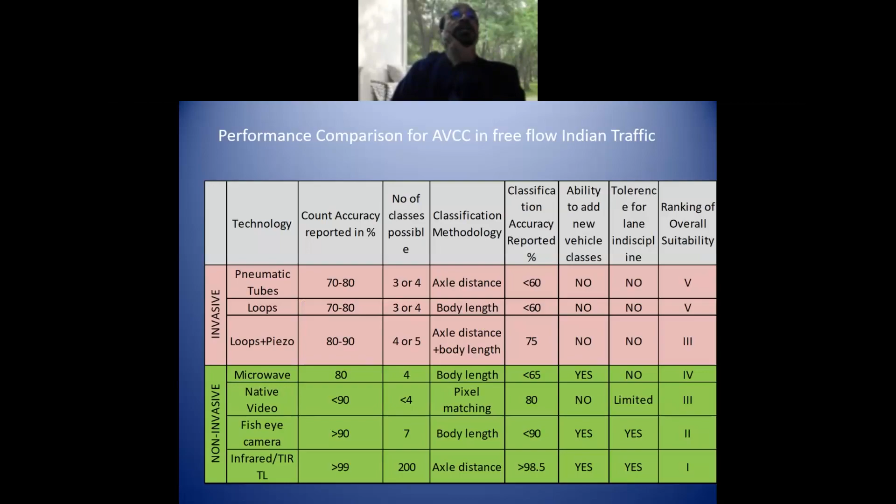And the system can actually collect data on each and every axle. This is the first axle. After that, it is saying for the first axle what is actually happening, second axle what is happening, like that. And you see when axles are more, 5 axle, 6 axle, you have more data for those axles also collected. The larger the vehicle, the larger the data.

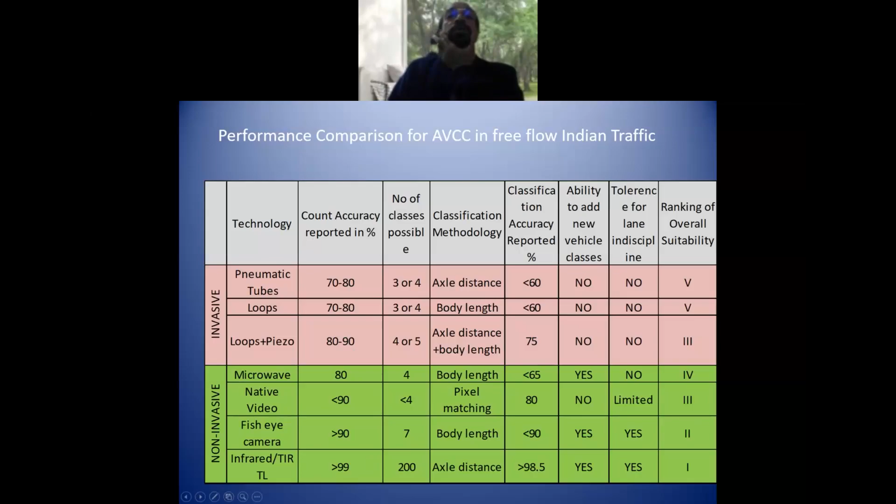I'm sure this will be a 5 axle. This is 5 axle - this is 5 axle articulated truck. So this is to what extent that can actually go and give you the information.

Stop sharing. Okay, let me get you back to the presentation.

So this is the presentation. I'm receiving it, all okay? Neeraj, it's okay?

Yes sir, good, good. So I have shown you the video demonstration and also some sample data from Excel, and these are the technologies which we discussed about. I also provided you what kind of accuracy and other things you can get here. I think we have 20 minutes and we have a lot, so let me go quickly.

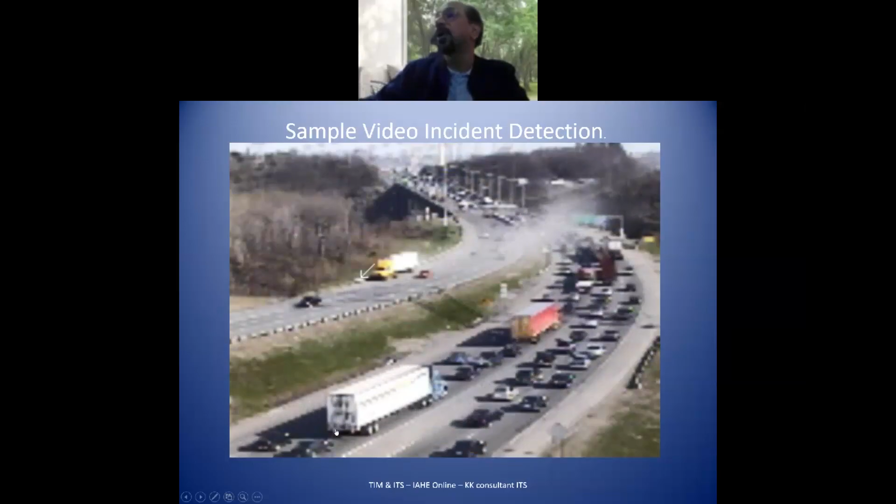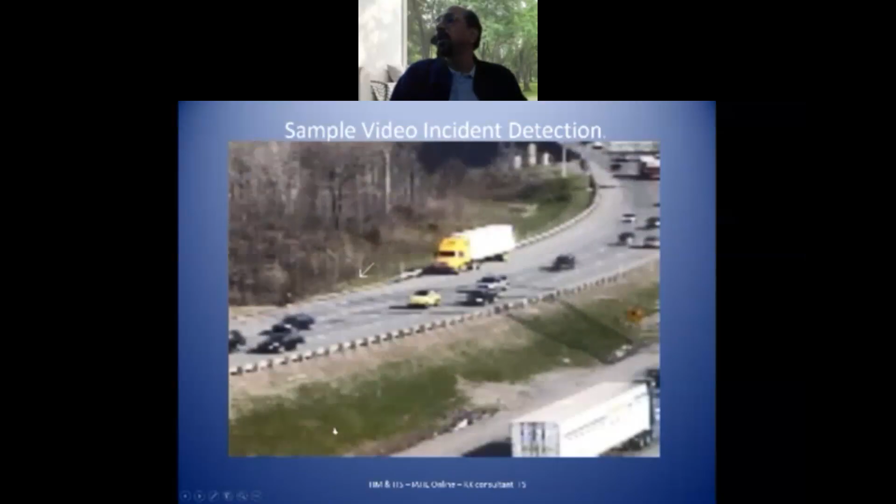And then you have detection by fast detection of incidents enabling video detection, as I told you. This is another thing I think - this is, I talked about video detection using cameras. These cameras are intelligent by itself. So you look at this camera in your control room and look at this feed, and after sitting here in front of this video, after some time you start sleeping. And when an accident happens, you really don't understand what actually happened.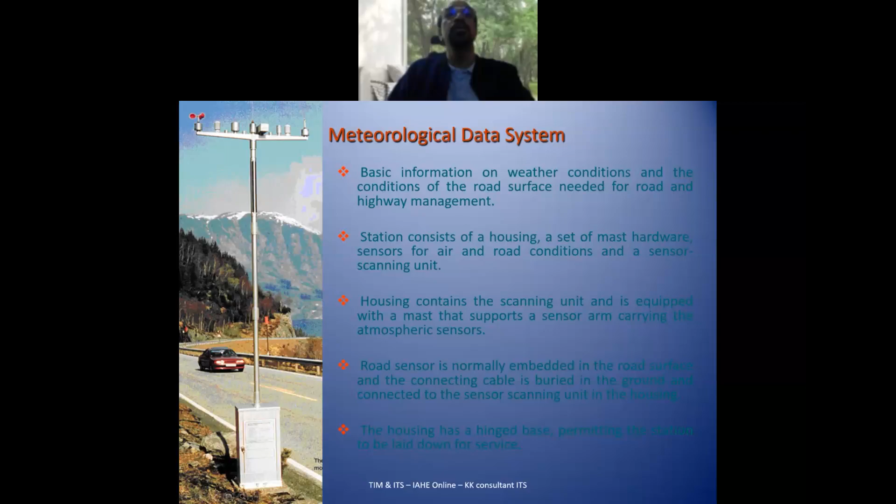You have meteorology systems, which are very common abroad, but much less in India. In the North, we need it during monsoon, and also most people are from the hill areas - there you need this kind of meteorology systems. Then advanced traveler information is one of the things.

Everybody nowadays travels using Google Maps. As a traffic engineer in my youth, 20, 30 years back, I had a dream of providing traffic data - you get down at the airport in Delhi or Chennai or Calcutta, and you give me your location, you wanted to go to the Mantralaya or Writers Building or wherever, and you will know the exact time displayed there on the VMS, which was the case earlier also.

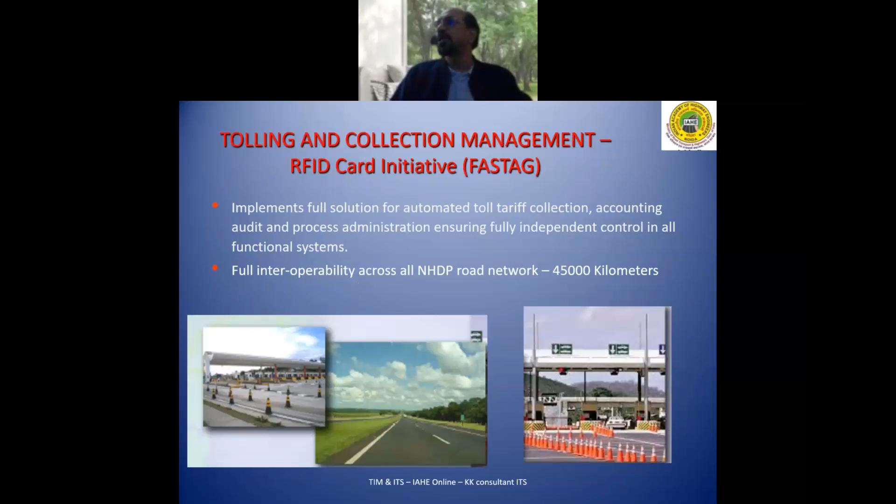In earlier days, when I used to go to London or even Singapore or any city, you get down from the airport and it will say city center, 18 minutes. They keep on showing their data on the VMS. But in India, there was no such thing. So our idea, our attempt in those days, was to provide something like that.

And one fine day, Mr. Google came and he stole all the dreams, and now he gives it to everybody in their hand. This is a detection and prediction software, and it uses VMS and other advisories.

This also helps commercial routing and delivery services. This is already operational in Singapore. What happens is that ITS data is also shared with the public - you can go and develop an app.

Suppose you are in a logistics business, distributing something based in a city, and you have your trucks and things moving around, and you wanted to give them a proper route. You develop an app for your business, pull out the data from the traffic control center on traffic information, use it in your app so that you define a better distribution network. That is already possible in many cities.

And then there are tolling systems. I don't want to spend much time on that because you already have another exclusive project discussion on tolling and collection management. But tomorrow I'm going to look at toll plazas of the future.

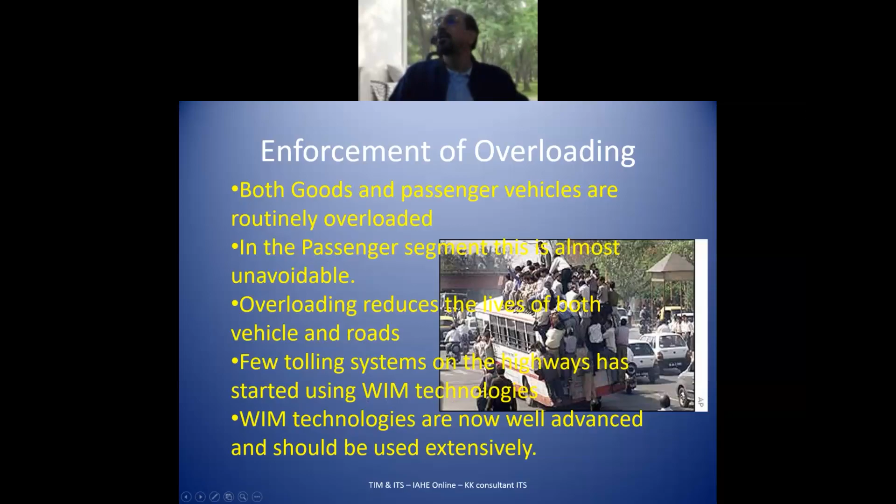Then there is enforcement, which is a very large area, not very important from the later part. This is part of operations - drivers are to be tested, and then you have real-time enforcement as part of your operation, and you minimize personal contact and cash transactions, transparency, improved enforcement index, reduction. And the best thing is now there is a legal framework for it.

Facilities for periodic calibration are not available in India, unfortunately. Database sharing is among that - you know about Vahan and Sarathi initiatives where you can get data. There is equipment and back office required for online operations like this, and you have operations and maintenance.

Speed enforcement - these are the technologies that you normally use for speed enforcement. And then overloading is another major area where in India, both goods and passenger vehicles are routinely overloaded. Weigh-in-motion technologies are now well advanced and should be used extensively.

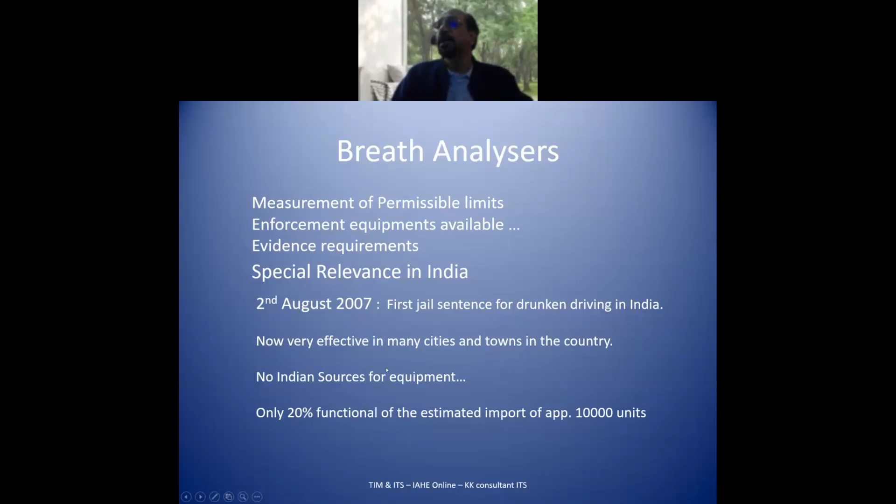At the moment, I think it is a little too much. And this is another thing which we have to address now.

In India, we had no lanes, and now we have lanes. I started the thermoplastic business in India in 1994-95, when there was no thermoplastic available in India. We imported thermoplastic and marking machines from Germany and then from the US. Mumbai Corporation tried to help us in the beginning, and the first project was the Delhi Ambala Road, which for many years became a model of road marking. People used to say they wanted that company to do it, and we continued doing it. Now it has become very common, and we are out of that business. I'm no longer in it, but that was one of the good things that happened to India at that time.

These are the breath analyzers. After COVID, they are using much less of this. The problem is this requires constant recalibration and surveys. All these breath analyzer systems in India are imported, and only 20% are functional.

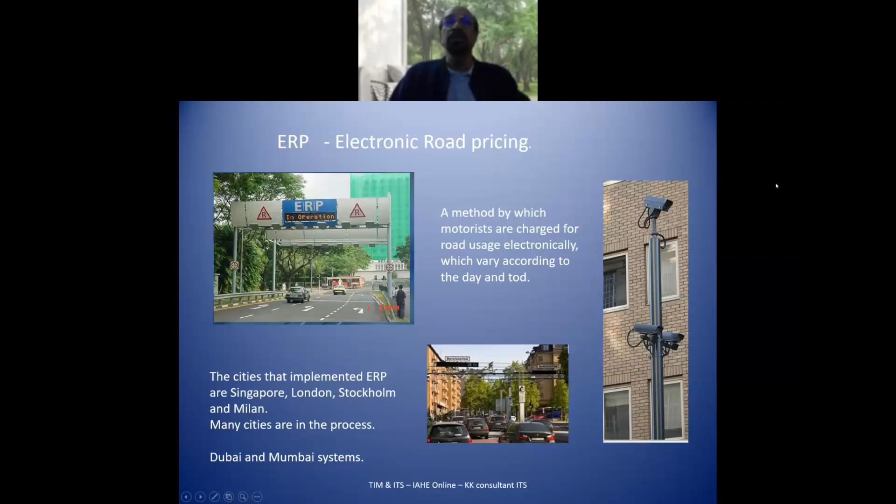In India, they tried to outsource one project with a few of these kinds of systems. One officer who was eager to get this going had it awarded quickly to a government company, and they installed one system. It didn't work because things were not well thought out, and it was subsequently scrapped.

The importance of persuasive enforcement: it is recommended that any automatic enforcement should go hand in hand with improvement in services and introduction of technology solutions for mitigating commuter woes. This is another thing about tolling and road pricing.

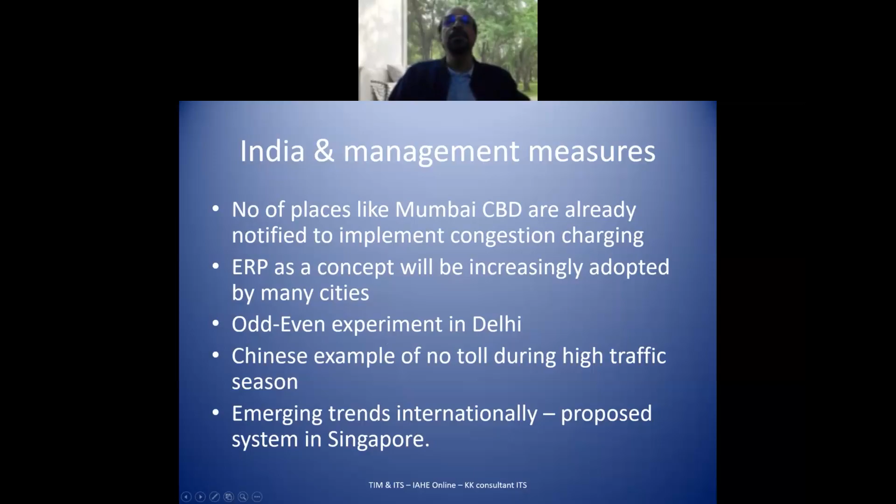Then there is congestion charging: charging users of a transport system for network usage during peak periods to reduce traffic congestion. Congestion charging and road pricing have two distinct objectives: revenue generation and demand management. Congestion charges are dynamically assigned as per time of day, day of the week, and holidays.

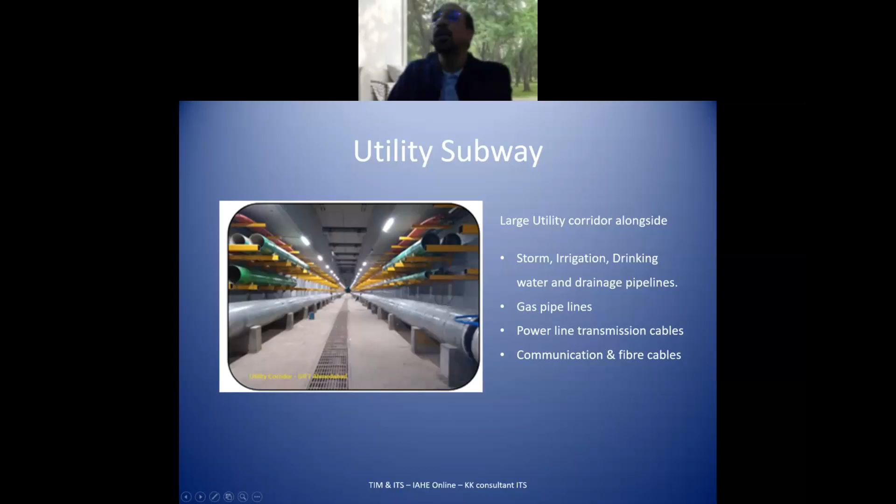Now, in India, these measures are yet to come, but we have some technical measures. In Mumbai, CBD is already notified, but it is still a long way off. Odd and even vehicles in Delhi was an experiment which is a joke, as all of you know. There's the Chinese example, not applied during high traffic seasons. During Diwali, how many people got stuck on the highways?

Again, during Christmas vacation. And in Singapore, they have a much better road system where they are going to charge for it. So these are the design components. These are not much in operation.

That is why I am saying this is how ITS is going to grow in future. For the proposed Mumbai-Nagpur Super Expressway, I was doing initial research and initial design for the ITS, and there are many modern things we have planned for it. I don't know how much of them will be implemented.

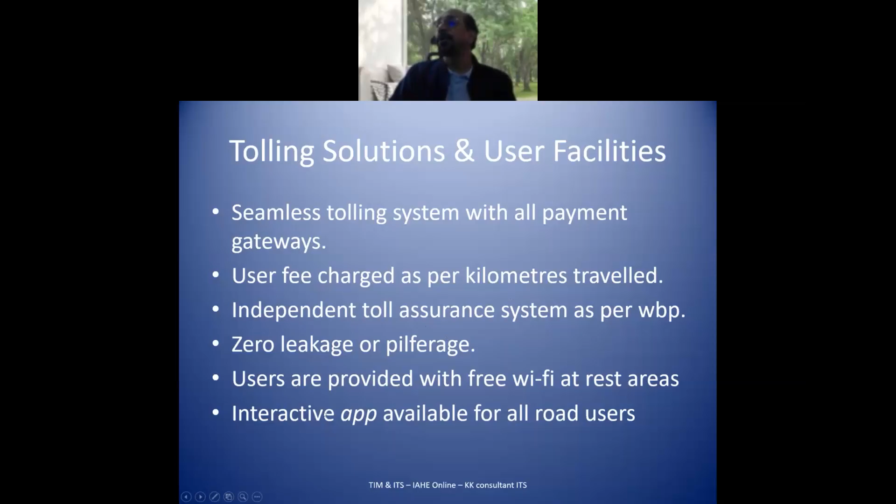We have a utility corridor running alongside the road till the end, which will take care of storm irrigation, drinking and water drainage pipelines, gas pipelines, and all that. We also have numerous fist holes, other than regular manholes, on the utility corridor. These fist holes will be populated with electronics and sensors to engage passing vehicles via V2I communication. This will enable safety of driverless vehicles and cars.

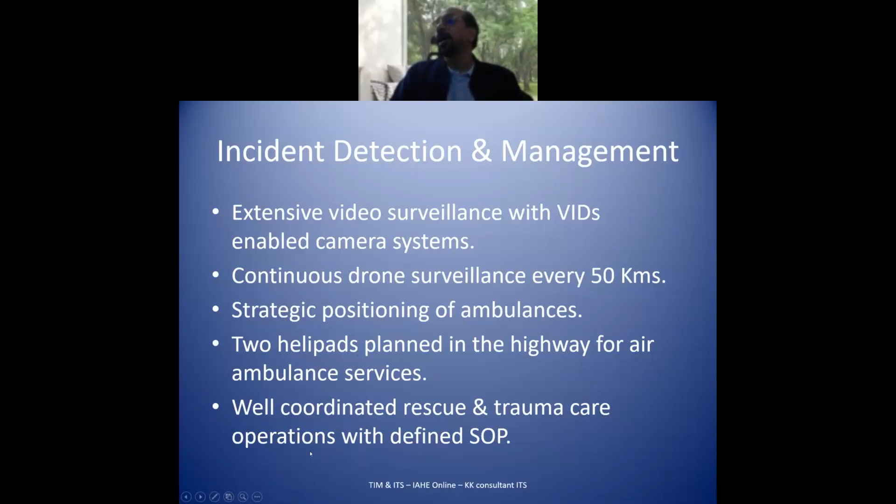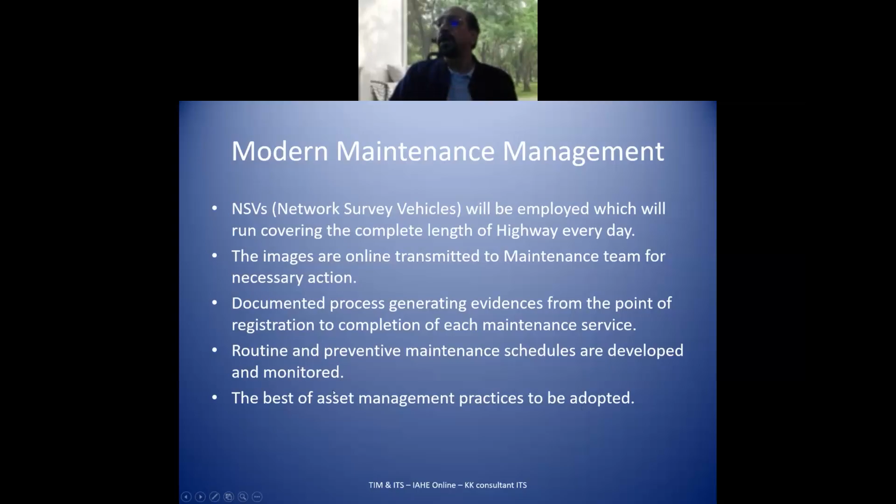It is possible to run huge road trains, which are interconnected cargo trucks, via Bluetooth. You have a number of cargo trucks connected with Bluetooth, and on the highway, from one end to the other, you have an electronic guidance system. The driver in the first seat connects with this system, and it goes, and every vehicle follows. A road train goes at a speed of 120 to 150 kilometers per hour with high speed and very well connected vehicles.

Seamless tolling is what we planned for that. This is the user fee we are planning: not for entering and exiting, but you simply pay this fee.

However you use the road doesn't matter. There's an independent toll assurance program with zero leakage. Interactive systems are available for all road users, and there is a super incident detection and management system planned for this.

We have continuous drone surveillance every 50 kilometers, with VID enabled cameras at strategic positions, ambulances and recovery vehicles, and 2 helipads planned on the highway for air ambulances, ensuring well-coordinated rescue and trauma care with defined SOP.

This is the modern maintenance management system. Network survey vehicles are employed for both directions, running every day. Images are transmitted online to the maintenance team for necessary action. A documented process generates evidence from the point of registration of a requirement to completion of the maintenance service. We have routine and preventive maintenance schedules developed and monitored, following best asset management practices.